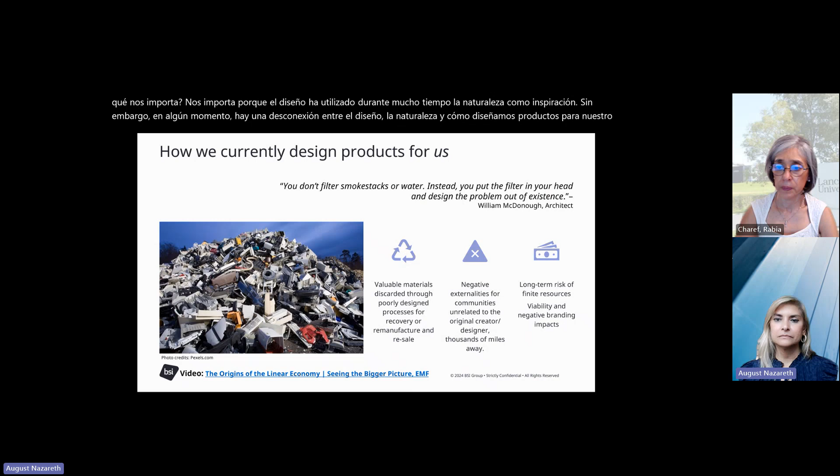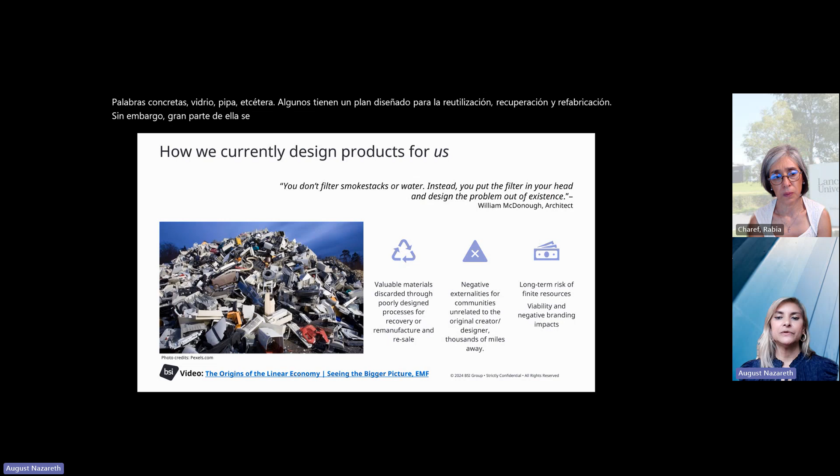In a building, a collection of highly valuable materials and products like steel, concrete, woods, glass, pipe, etc. Some have a designed-in plan for reuse, recovery, remanufacture. However, much of it will be discarded because there isn't a way for these materials to get back into the supply chain or secondary materials market.

However, we think this is a matter of time before QR codes, RFID, and IoT sensors are used to tag, meta-tag, and identify the manufacturer and life stage. Reverse logistics and take-back information will become visible via digital twins and similar technologies. And we suggest it will happen because of new laws, environmental regulations, and extended producer responsibility.

So why do we have this situation? We call this the linear economy. This is an economy that is a take, make, waste economy where goods always move in one direction, from raw extraction, manufacture, use, to waste. As we know, sometimes that use is only one minute, like the plastic bottle.

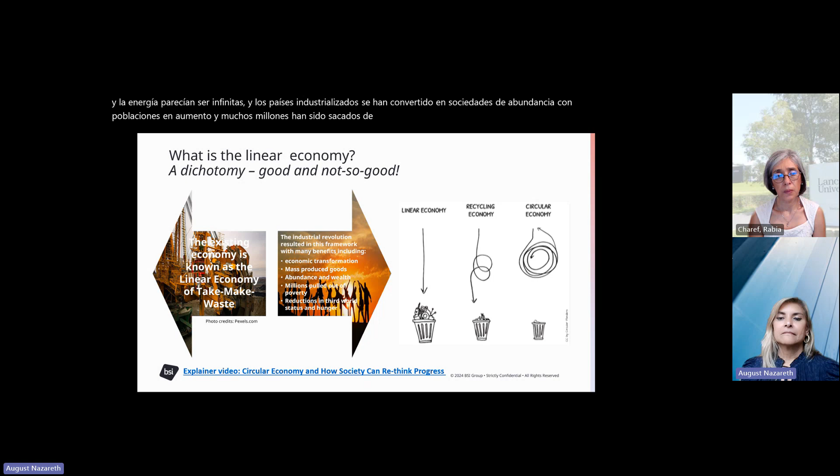The Industrial Revolution brought many benefits. For the first time, goods were able to be mass-produced, raw materials and energy seemed to be infinite, and industrial countries have become societies of abundance, with soaring populations, and many millions have been pulled out of poverty. So where there are middle classes that can afford to live without disease or hunger, this has a legacy footprint

of process, machinery, logistics, communities that rely on the linear economy. The next slide, borrowed from Rabia, shows the comparison of both economies, and perhaps we can understand why it's difficult to get out of this linear economy. Here they are illustrated together.

But for now, we know that there is funding available through the legislative acts, and there's an impetus for change, and we think that it will arrive with new project requirements. Further, design software is getting more sophisticated in terms of built-in sustainability for building performance, material choices, etc. There are many opportunities to make a difference in individual ways that fit your organization.

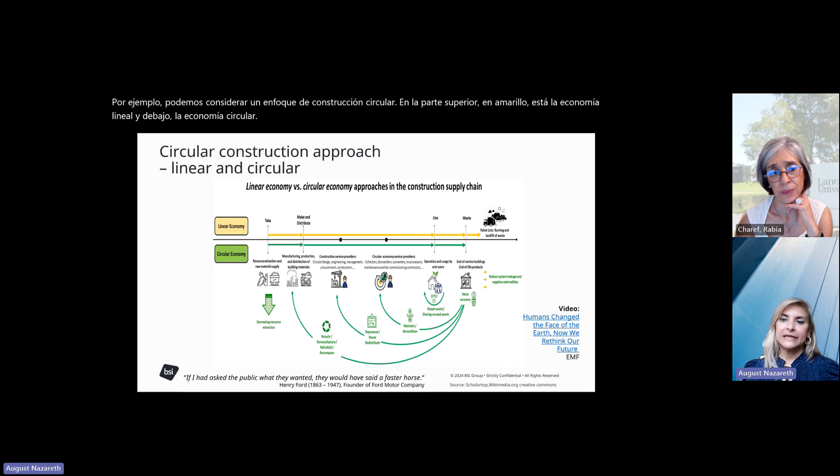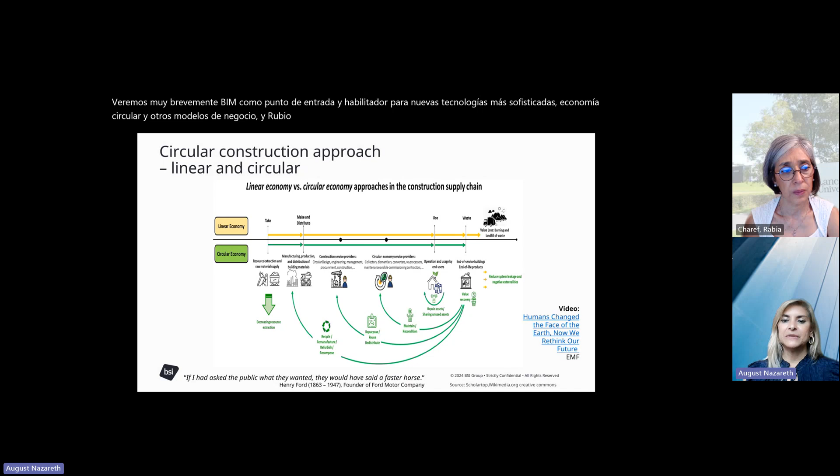For instance, we can look at a circular construction approach. On the top in yellow is the linear economy, and below is the circular economy. We'll look very briefly at BIM as an entry point and enabler to more sophisticated new technologies, circular economy, and other business models. And Rabia will walk you through the business case of why BIM and 3D modeling makes so much sense.

BIM is the foundation for sustainability, circularity, and is really an entry point to many more technologies. Because a lot of what you need to do in sustainability and the circular economy is based on data. If you can't find it, then you can't reuse it. You can't take it to the next critical operation.

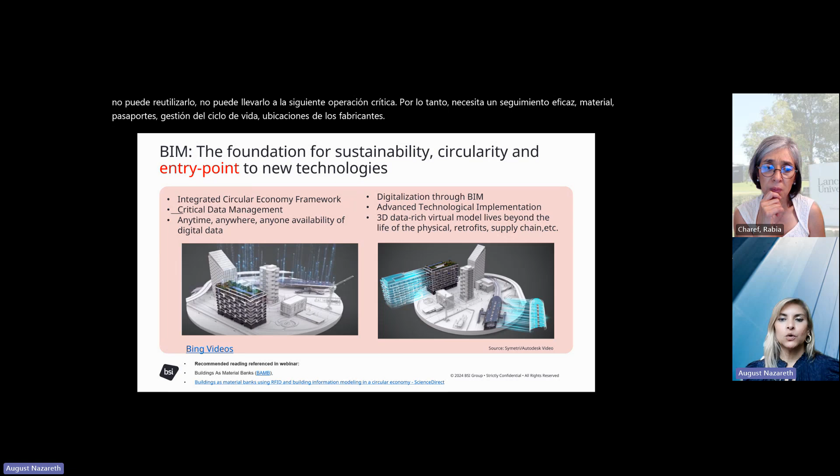So you need effective tracking, material passports, life cycle management, manufacturer locations, future ESG considerations for scope 1, 2, and 3, and also extended producer responsibility regulations, which are coming. Yes, this is what BIM does for you.

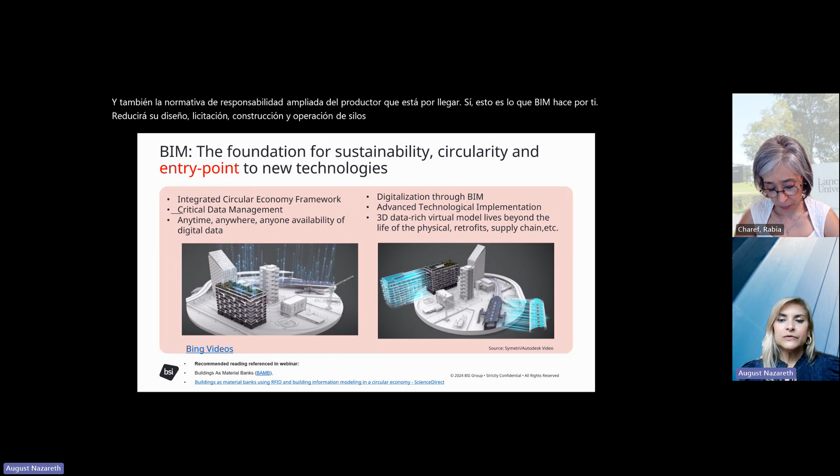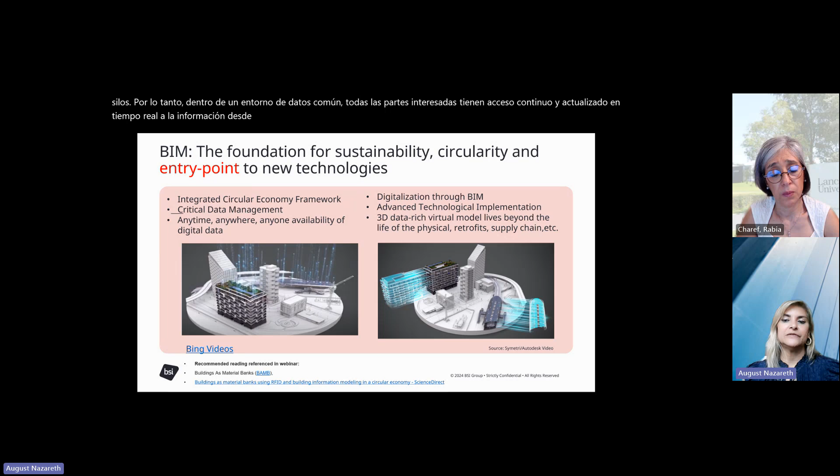It will reduce your design, bid, build, and operate silos, and if done right, remove those silos. So within a common data environment, all stakeholders have continuous updated real-time access to information from any place, anywhere, throughout the project, and even beyond project teams.

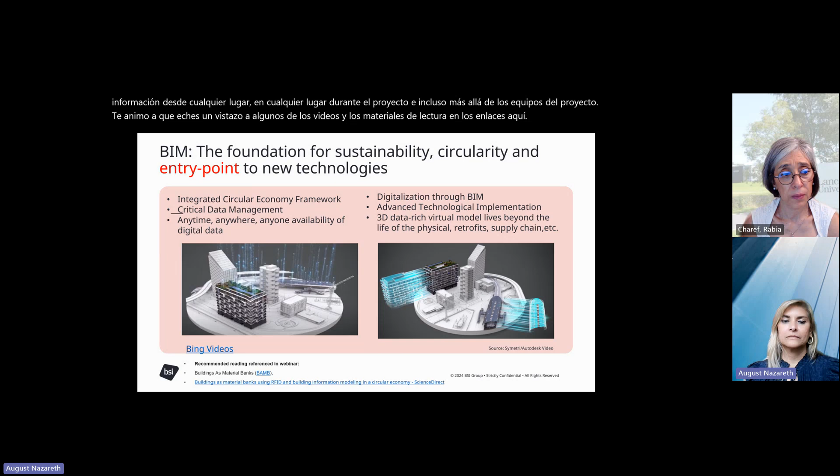I encourage that you take a look at some of the videos and the reading materials in the links here. I will leave this here for reading at another time, because we're out of time to get to my case study. But briefly, these are all enablers to get to the data, because data is the backbone of the circular economy.

So here is a case study of the Ford Rouge Center, which is the Ford car maker site and facility. It's a master planning and revitalization by Bill McDonough of Cradle to Cradle book.

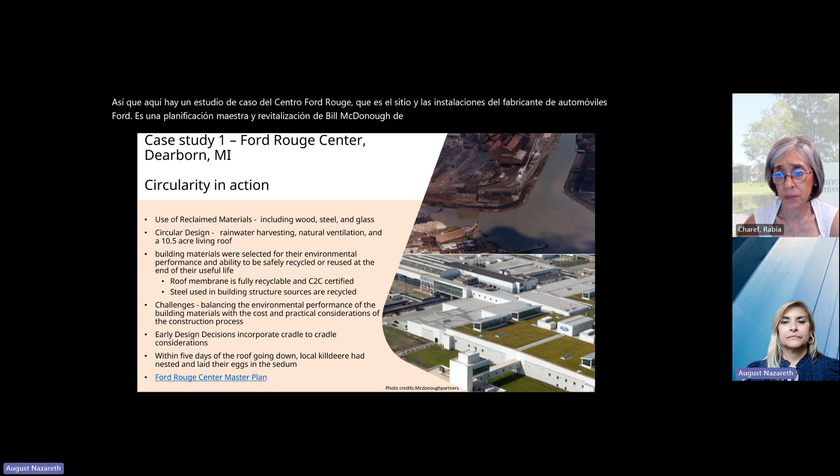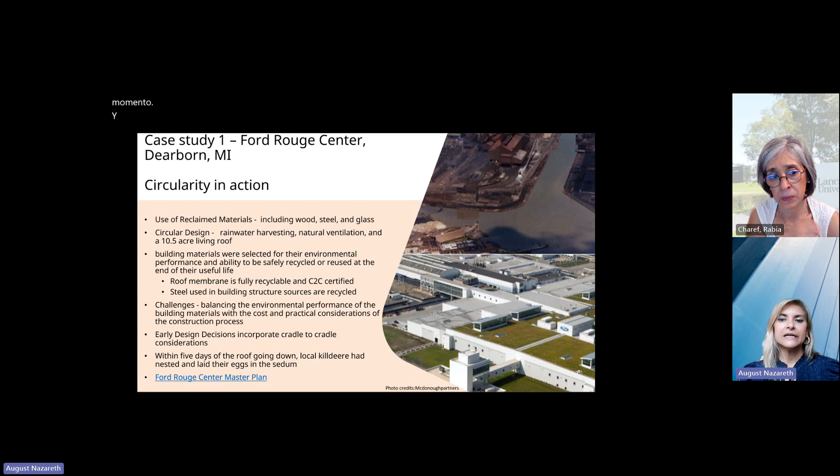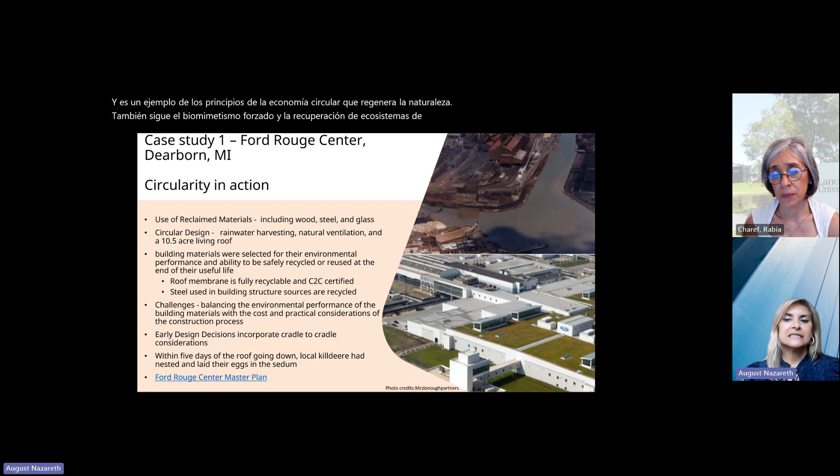At the heart of the new system lies a 10.5-acre living roof, the world's largest green roof installation at the time, and is an example of the circular economy principles that regenerate nature. It also follows forest biomimicry and closed-loop ecosystems, reclaim and reuse of wood, steel, glass in a continuous cycle.

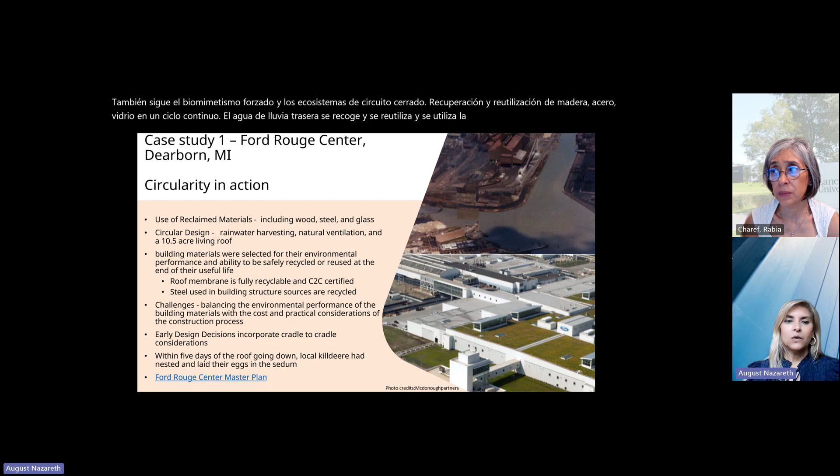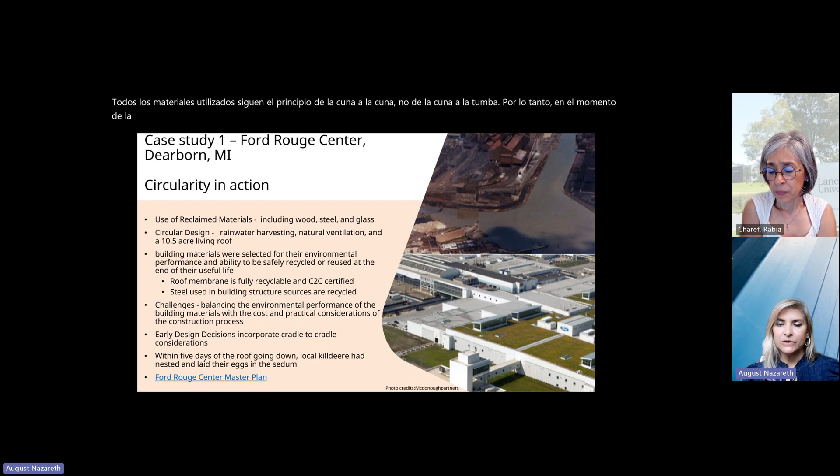Rainwater is harvested and reused, and natural ventilation is used throughout. All the materials used follow a cradle-to-cradle principle, not cradle-to-grave. So at the time of install, there's awareness of where that material, once it reaches its useful life or gets degraded, where is it going in the next process? And it's something that is not landfill or incineration.

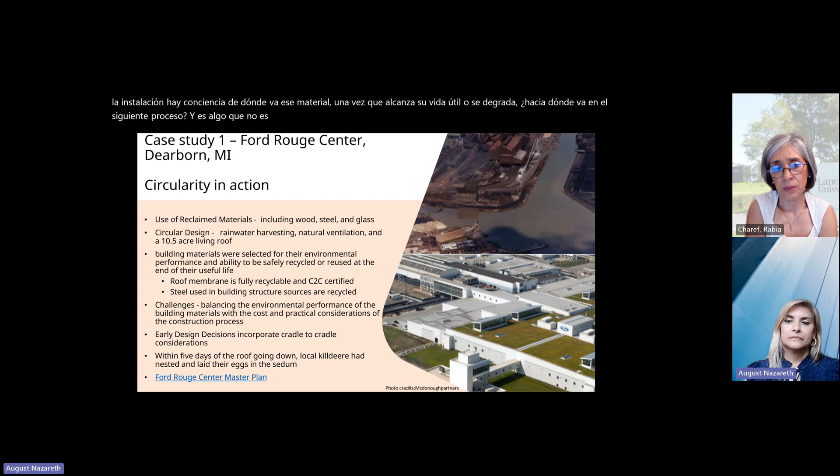Again, there's a link here that is very useful to take a look at it. And now I turn you over to Rabia Charef and her very interesting case study featuring 3D to 8D, which is a result of many years of research.

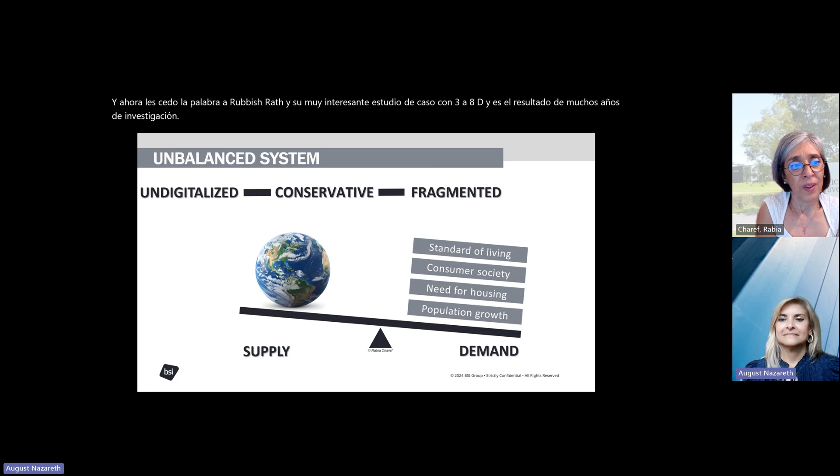Thank you, August, for sharing insights on this fascinating topic. So just to sum up what August just said, what is the problem for the construction sector? The sector is responsible for an enormous volume of waste and consumes a huge amount of natural resources. But the undeniable truth is that we have only one planet with limited resources, and the demand is continuously increasing. Another reality is that the construction sector is lagging behind compared to other sectors. It is still undigitalized, fragmented, and clinging to conservative practices.

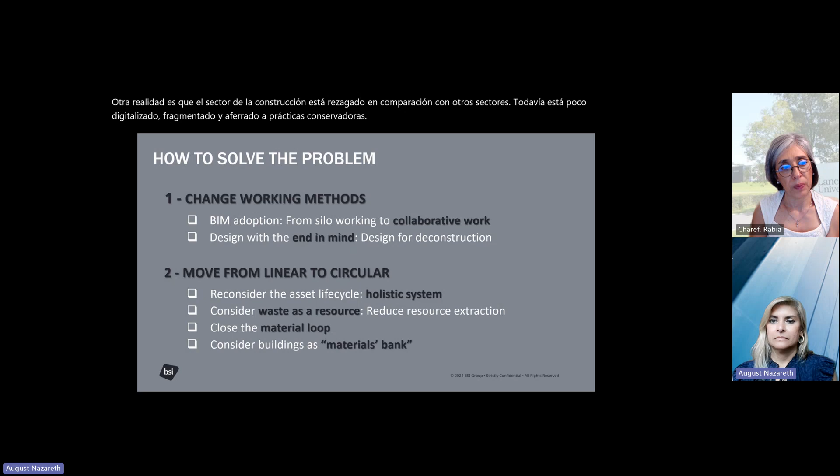So we are facing a lack of efficiency and a sustainable growth dilemma. How can we address these challenges? First, we need to digitalize our sector. This means adopting technologies like BIM to streamline processes and improve efficiency.

Second, we must change our design methods. We need to start by designing buildings with their end of life in mind. We need to think about how these buildings can be adapted and repurposed over time to ensure flexibility and adaptability. We also need to think about what will happen to the material when a building can no longer be used. This is where design for disassembly or design for deconstruction comes in, because these approaches make possible the reuse of materials.

We also need to move from our current linear economy to a circular economy, as it was explained by August. In a nutshell, we can say that the circular economy considers waste as a resource and buildings as material banks.

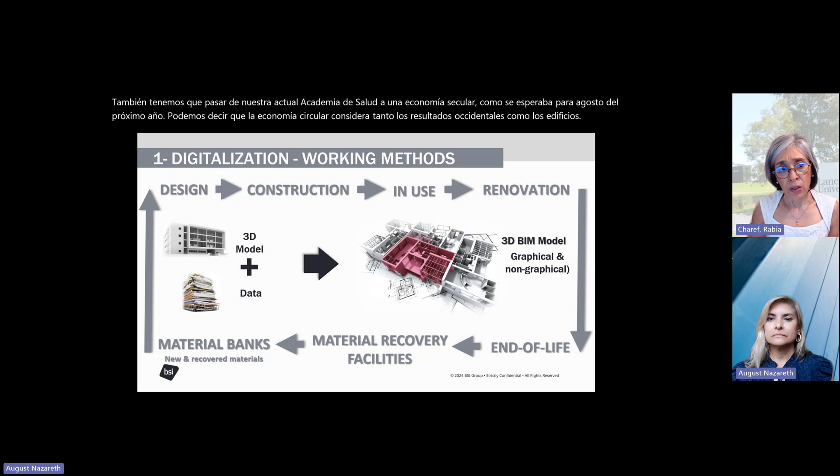So changing our working method, what does it mean? We need to move away from silo working practices and instead work collaboratively by using BIM technology.

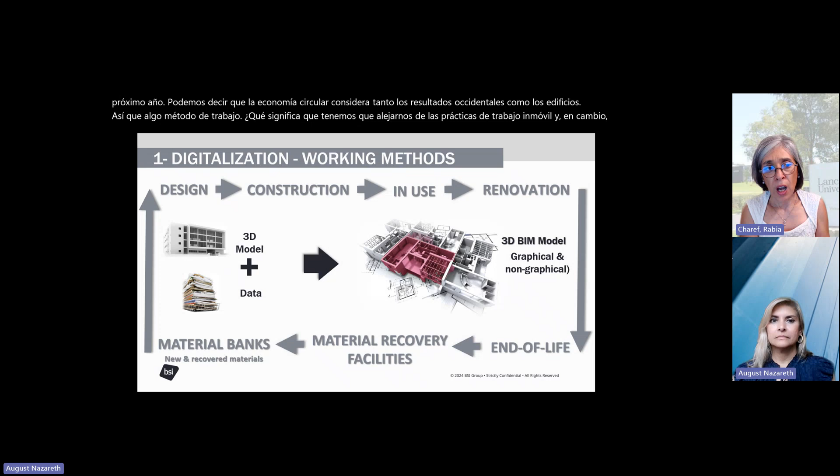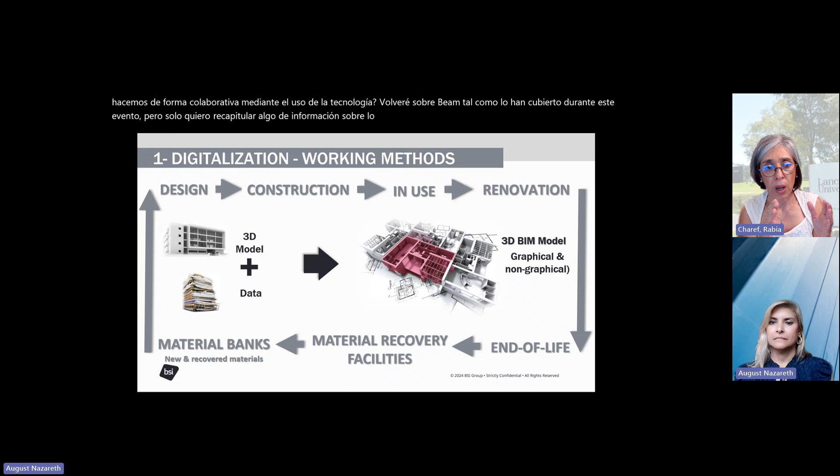I won't go back over BIM as you have covered it during this event, but I just want to recap some information about what is the 3D model and the difference with the 3D BIM model. It's the data that we put on it. We add graphical and non-graphical data.

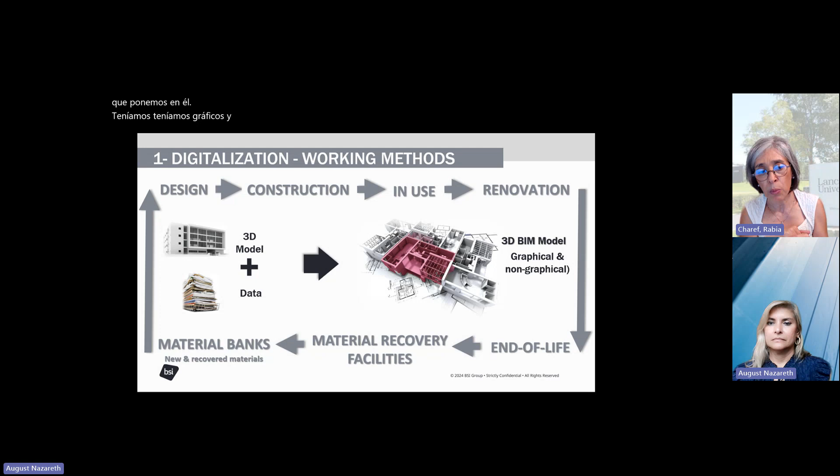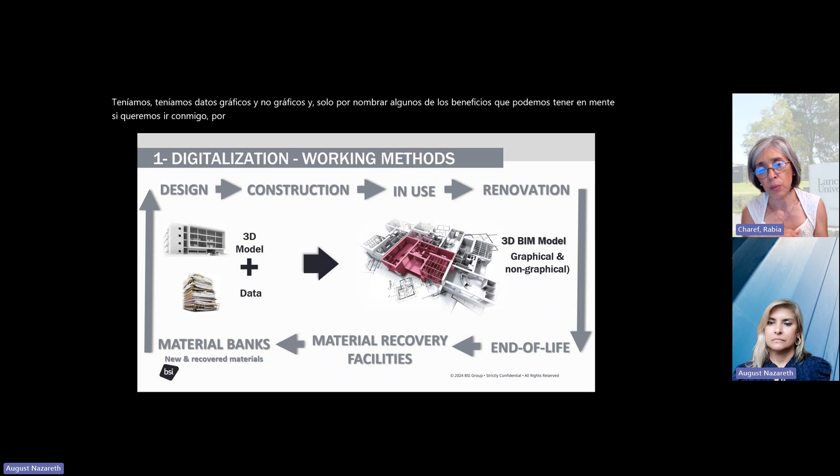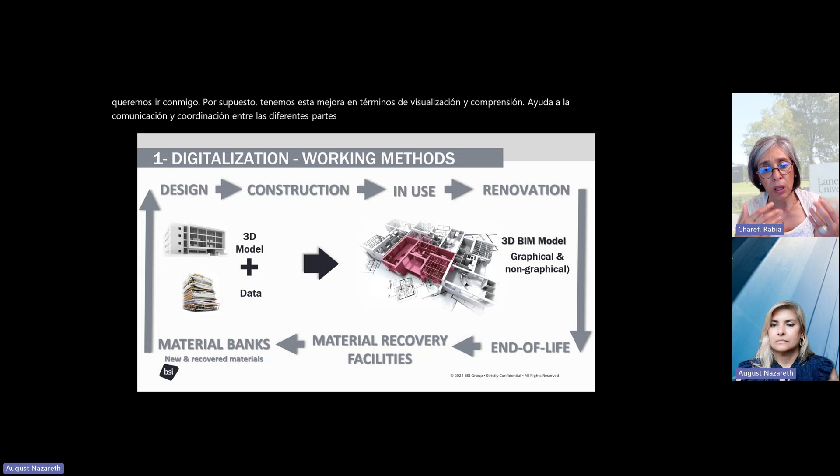Just to name a few benefits that we can have in mind if we want to go with BIM: we have this improvement in terms of visualization and understanding, it helps for communication and coordination between the different stakeholders, and also BIM can be used for the maintenance and operation of buildings.

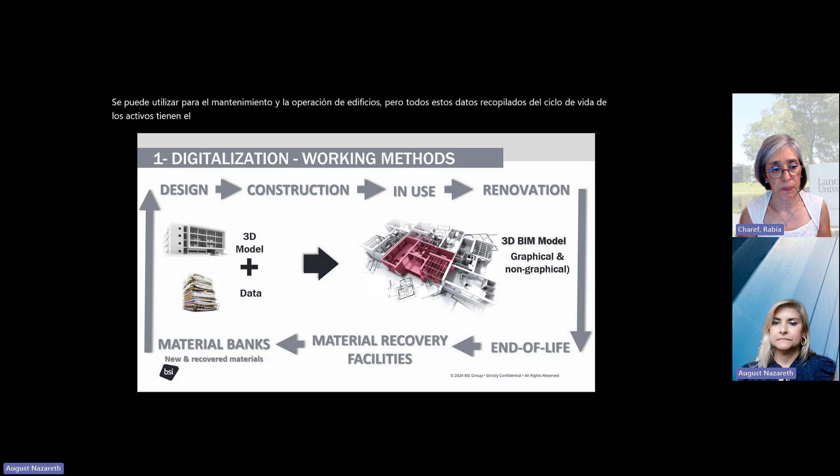But all this data collected throughout the asset life cycle has the potential to support the management of the end-of-life activities and beyond, because the data could be used by material recovery facilities and also by material banks or material platforms.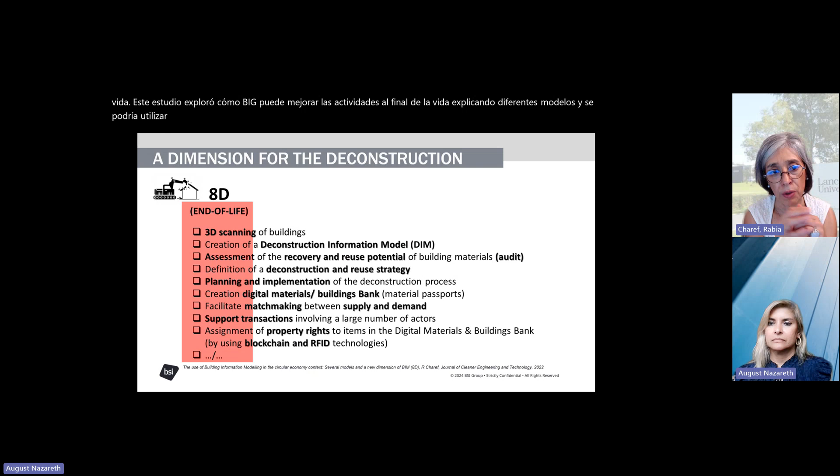More recently, in 2022, a study filled the gap and proposed the 8th dimension for managing the end-of-life activities. This study explored how BIM can enhance end-of-life activities by explaining the different BIM models. And the 8D could be used for the creation of the deconstruction information model, the model that will contain all the information related to the deconstruction.

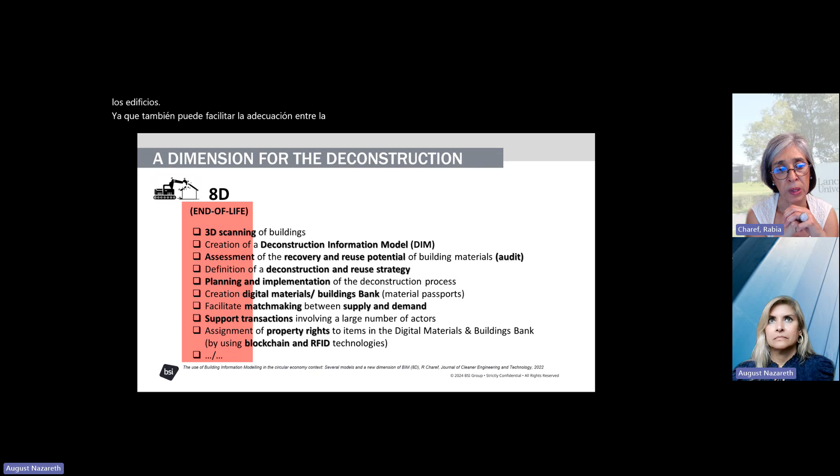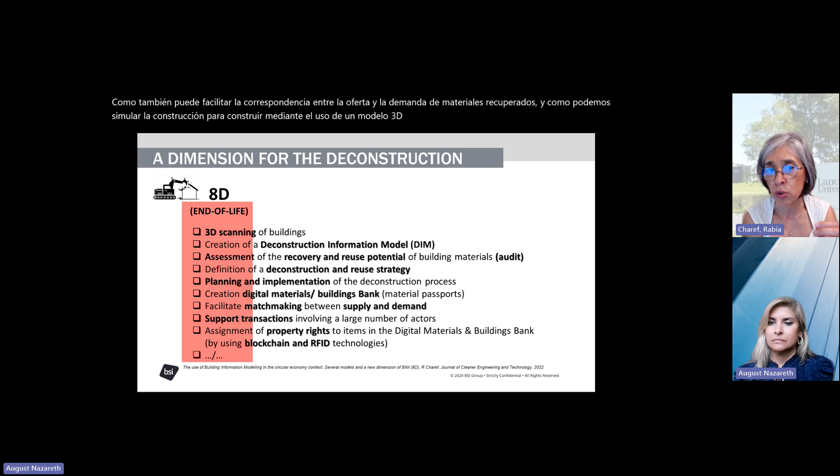It could help for the audit to assess the recovery and reuse potential of buildings, and it can also facilitate the matching between supply and demand for recovered materials. And just as we can simulate the construction of a building by using a 3D BIM model with 4D, we can also simulate the deconstruction scenarios and decide to go for the more sustainable strategy.

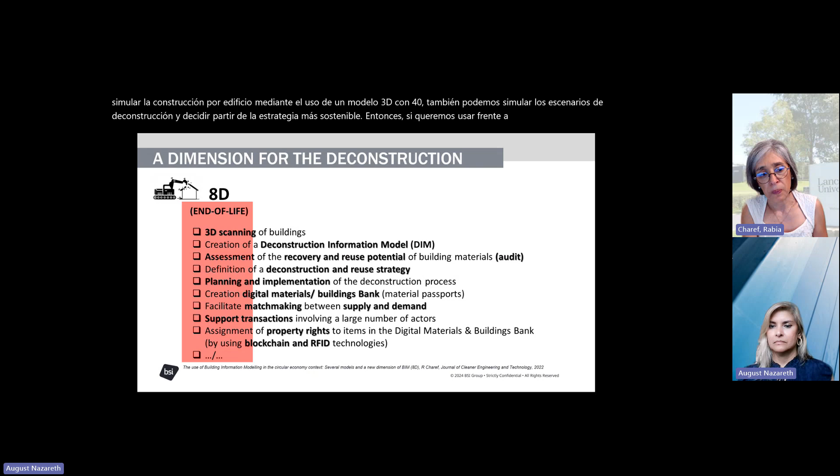So if we want to use BIM for the asset life cycle, we need to think about the data and how this data could be maintained and updated to be of very good quality. And that's where Material Passport comes in.

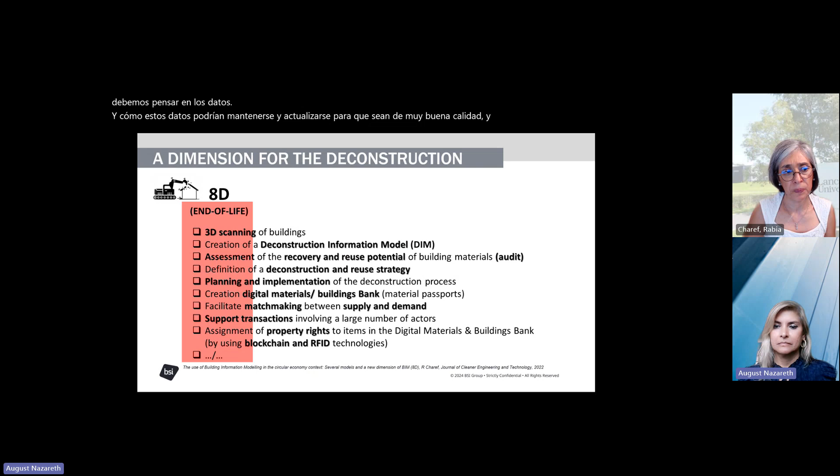So now, when all these materials are recovered, how can we facilitate their recirculation, keep them in a closed loop, and prevent them from becoming waste? According to Thomas Rau, waste is a material without an identity. So with Material Passport, we can provide this identity to every single material to keep them in circulation.

So to solve the problem, we also need to move away from our current linear economy. Many studies highlighted the importance of refurbishing and reusing existing buildings if we want to meet our environmental goals. In fact, between 85 to 90% of today's buildings are expected to still be in use by 2050. So it is crucial to consider our buildings as material banks and extend their service life as much as possible.

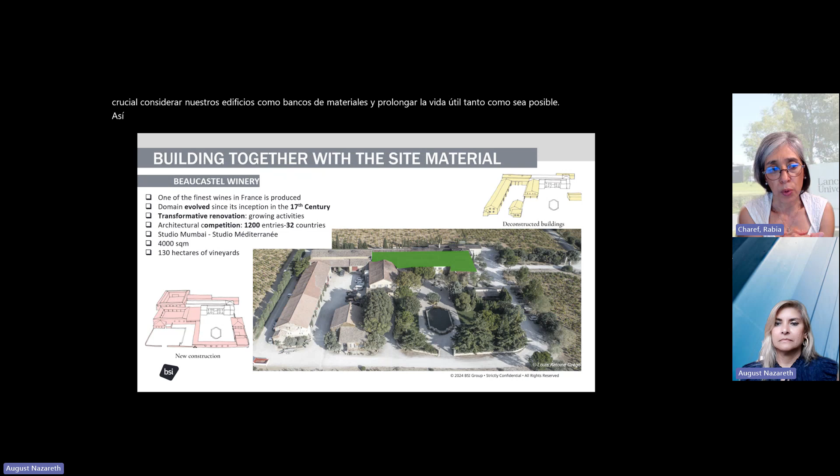So now let's move to a practical example of this approach. The project that I am going to present is the Beaucastel Winery, very famous for producing some of the finest wines in France. The original building dates back to the 17th century, and the domain has been extended several times.

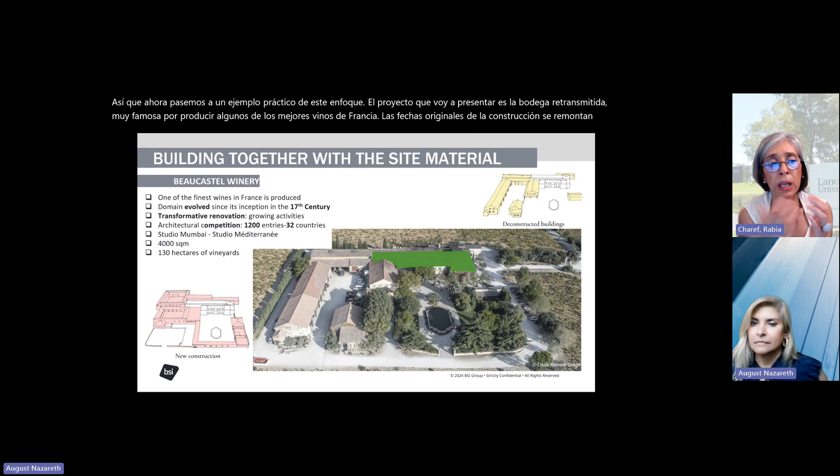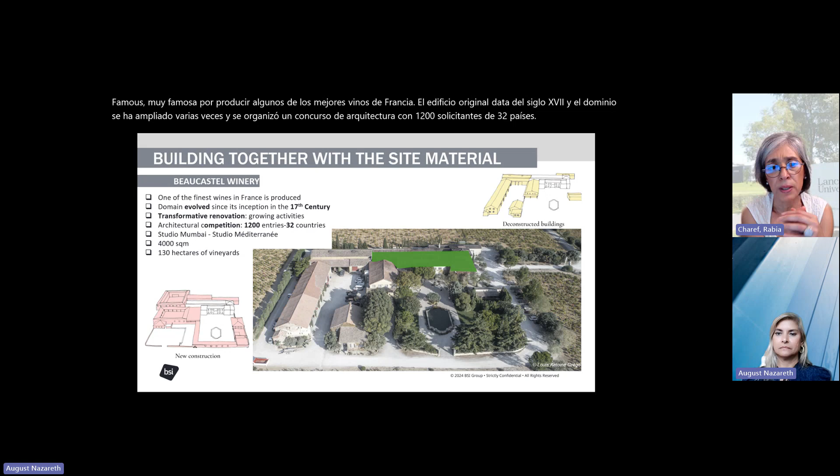An architectural competition was organized with 1,200 applicants from 32 countries. It's just to highlight the global interest of this project and the prestige. Studio Mumbai from India and Studio Mediterranee from France won this competition.

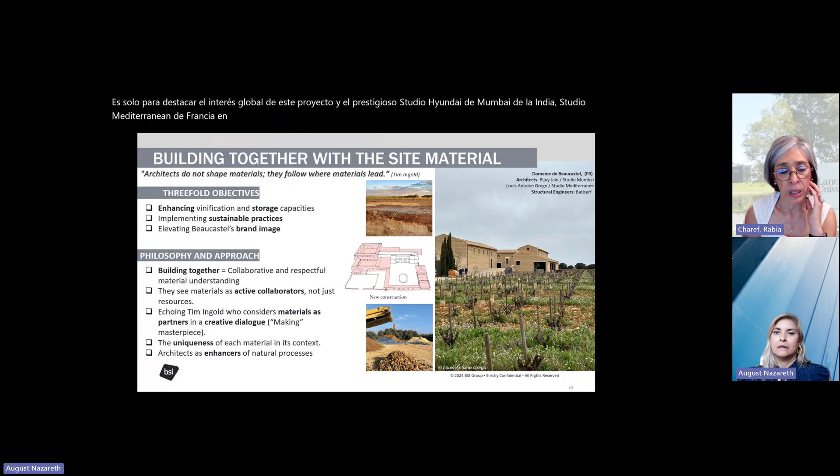This case study was designed by a team that considered their approach to be based on common sense and respect for the environment. The philosophy of this project centers on the concept of building together. This means developing a respectful and collaborative relationship with materials. They were inspired by Tim Ingold's making, who considers materials as active collaborators and not just resources.

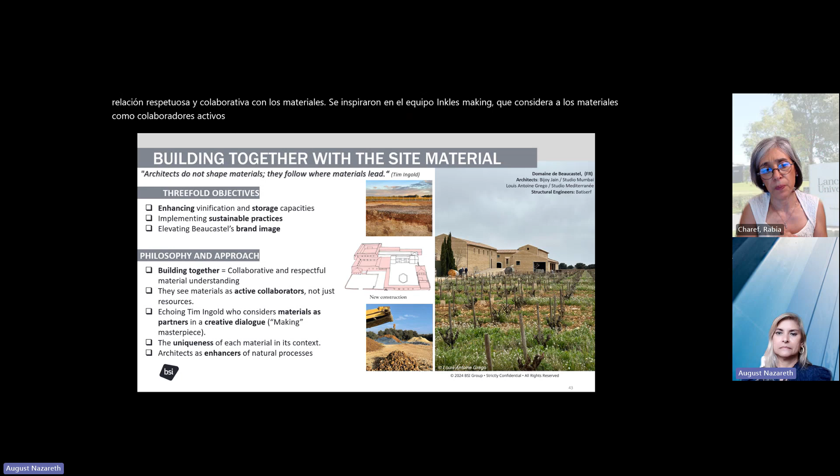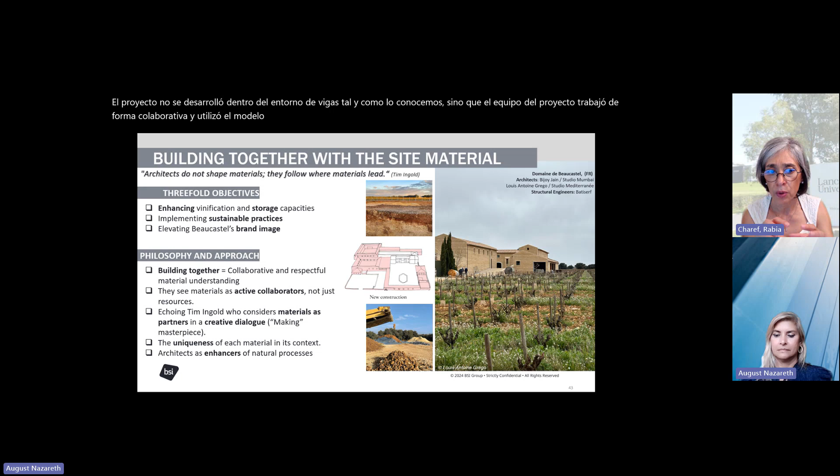The project was not developed within the BIM environment as we know it, but the project team worked collaboratively and used the 3D model to support their willingness to adapt the design to the material and not the other way around.

As architects, the team ensured that the design flowed naturally with the surrounding. They also integrated the design seamlessly into the environment rather than trying to impose it. This approach perfectly aligned with what August presented, the idea of mimicking nature where no waste does exist.

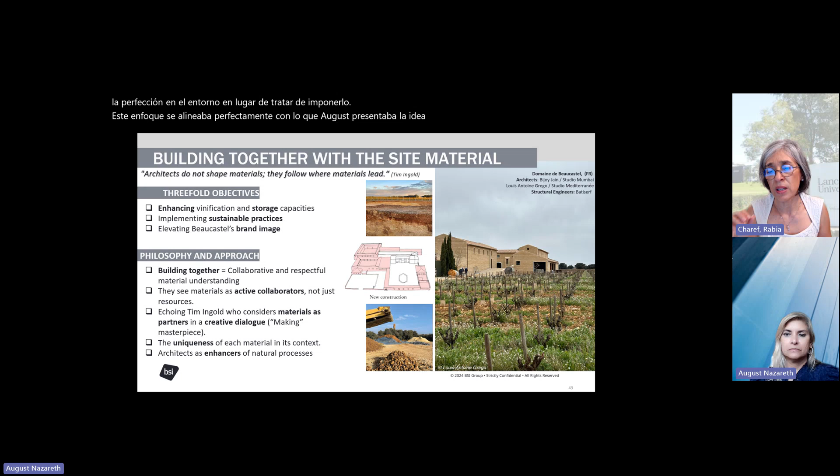Let me explain the approach and construction process for the Beaucastel project. For this project, the first thing they did was assess and understand the site and existing buildings. They identified what could be preserved, renovated, and reused.

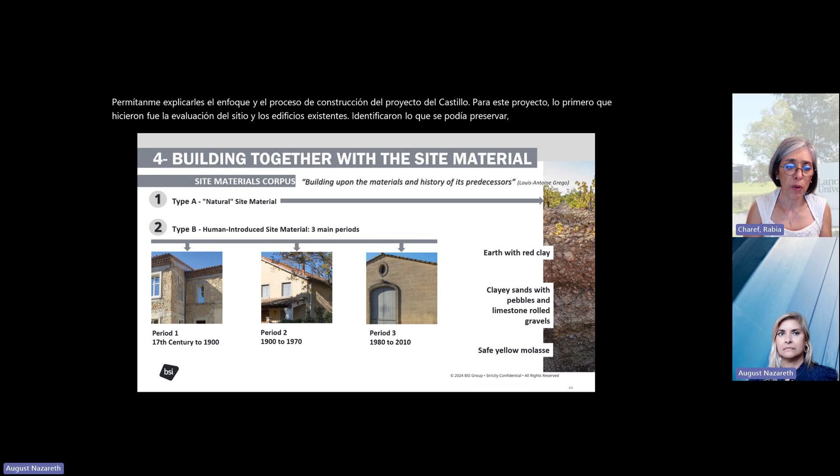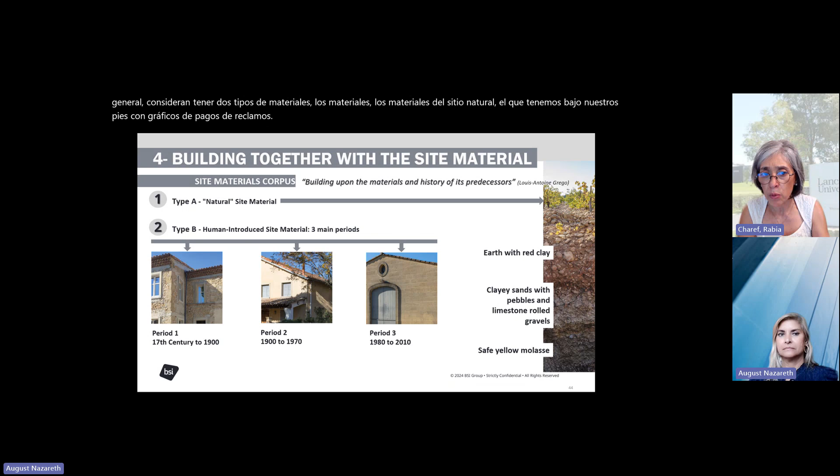They usually consider having two types of materials. The natural site materials, the ones we have under our feet, earth with clay, pebbles, gravels. The design team worked collaboratively with masons, structural engineers, researchers, and the client, and they looked at how they can use this material for construction.

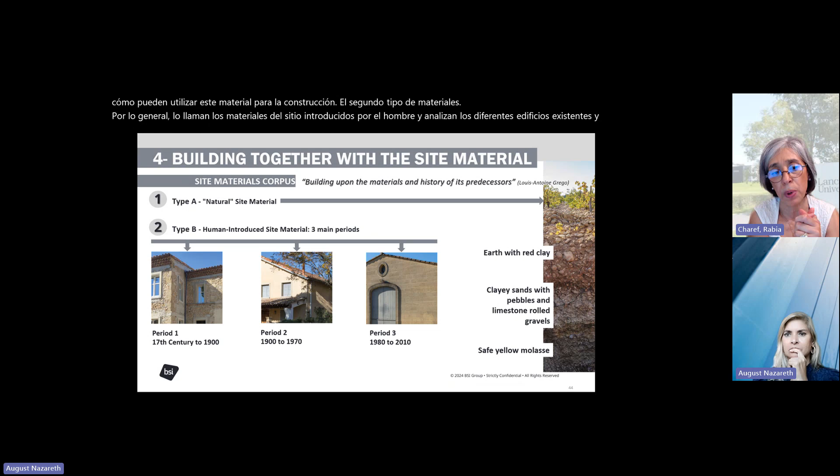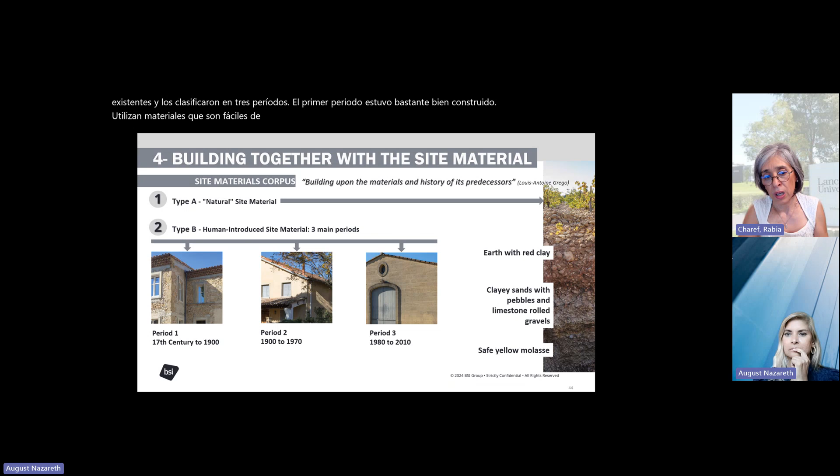The second type of materials they usually name the human-introduced site materials, and they analyzed the different existing buildings and categorized them into three periods. The first period was quite well constructed, and they used materials that were easy to reuse, like stone, pebbles, wood. So for this period, they kept everything and repaired the building.

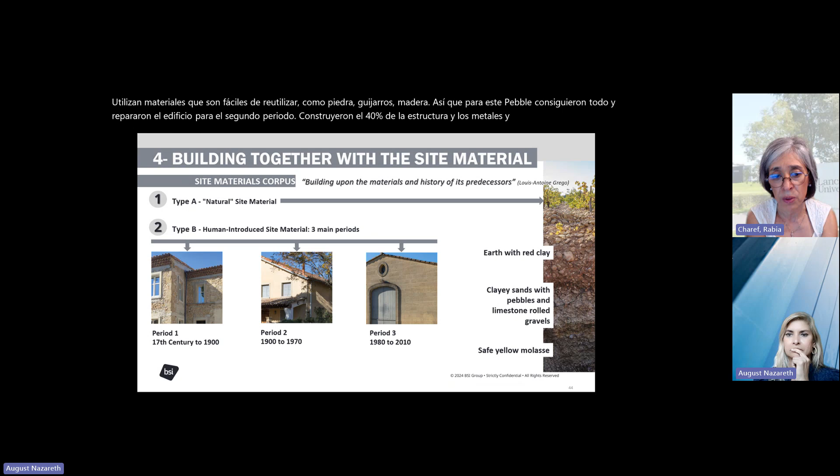For the second period, they deconstructed 40% of the structure and recycled metals and concrete. Unfortunately and interestingly, the more recent period has proven less easy to reuse for two main reasons. The first reason is that the buildings were mainly made with composite materials that are difficult to separate and reuse. And the second reason, they often contain plastics.

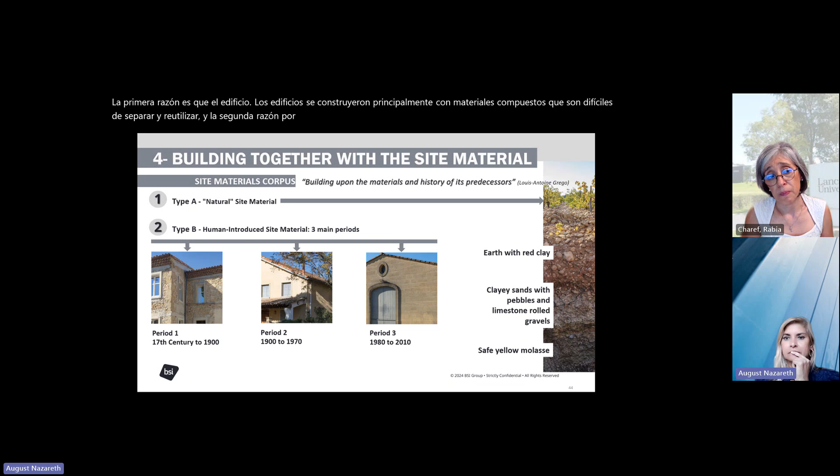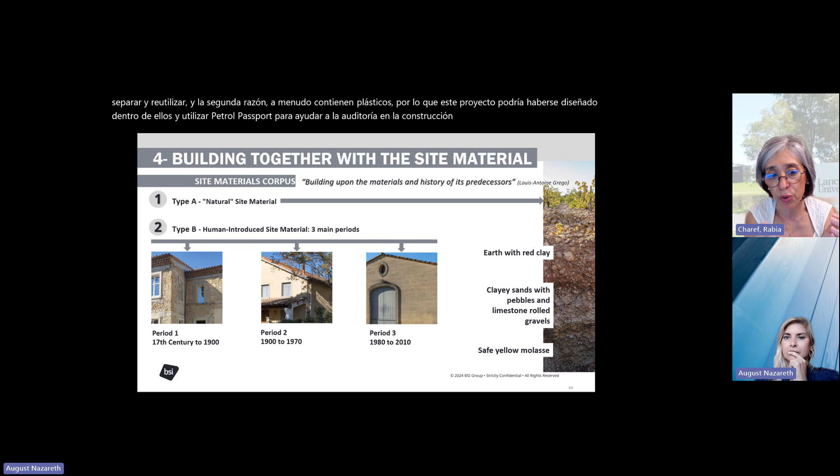So this project could have been designed in BIM and use material passports to help with the audit and the deconstruction. In particular, the use of material passports could facilitate the management and tracking of recovered materials. It will be easier in the future to reuse the material because they have an identity and the data related to their life.

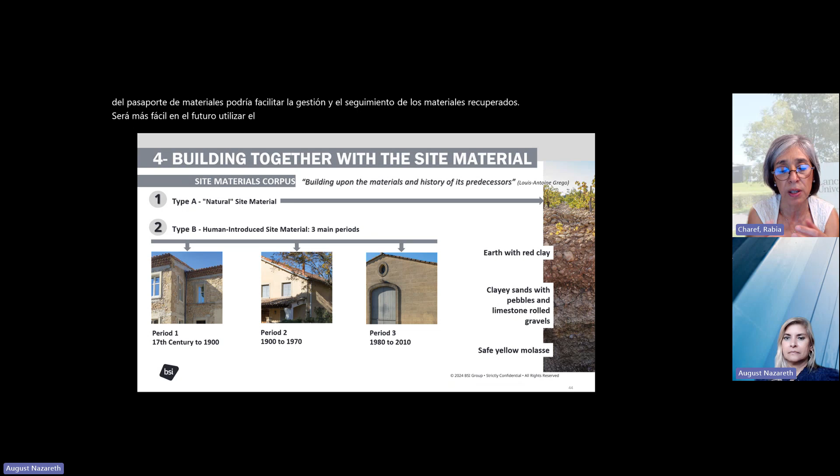Although this building is not certified as circular, it was designed and constructed with a closed-loop approach because it reused 80% of the existing materials.

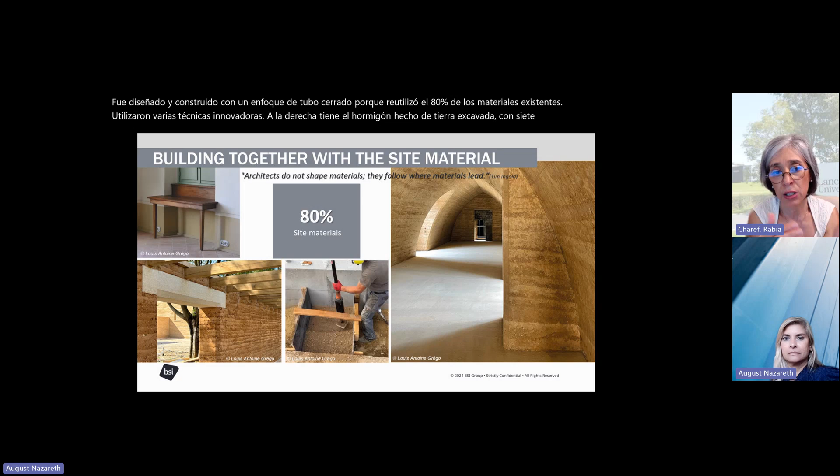They used several innovative techniques. On the right, you have the site-rammed concrete made of excavated soil with cement. On the bottom left picture, you can see the rammed earth wall. When the soil has clay, cement is not necessary to manufacture the rammed earth; they use just earth and water. And in the center, you can see the pneumatic rammer that was used for both techniques.

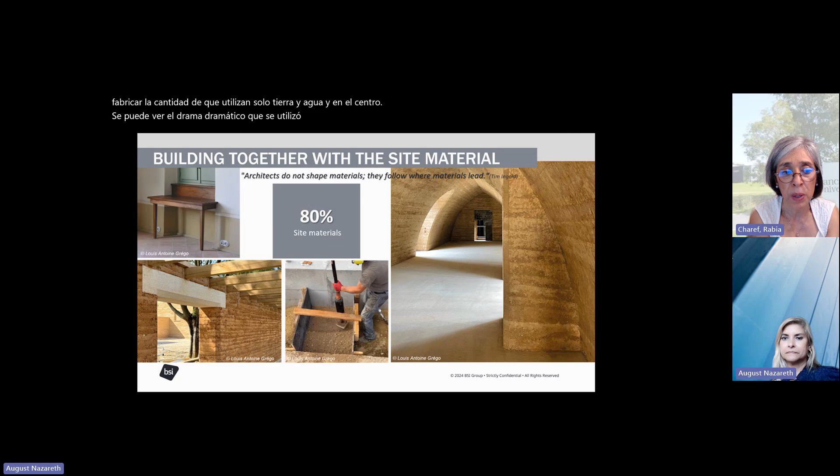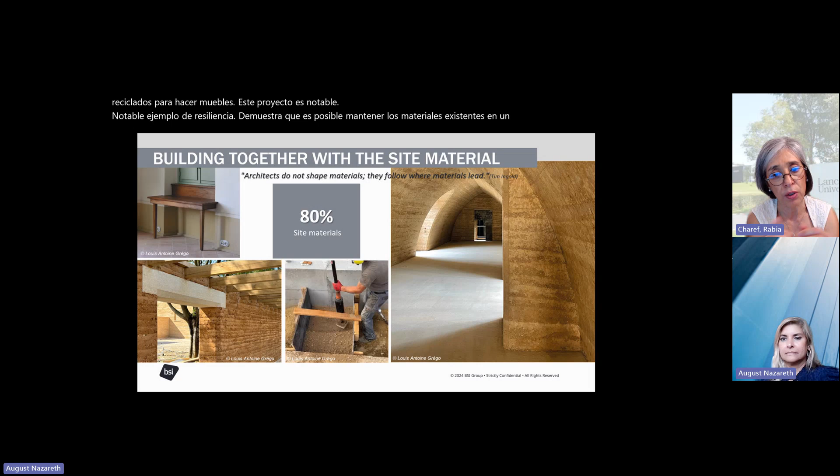Even old timber beams have been recovered and upcycled to make furniture. This project is a remarkable example of resilience. It demonstrates that it is possible to keep existing materials in a closed loop and limit the extraction of new resources. In this case, it was 80%.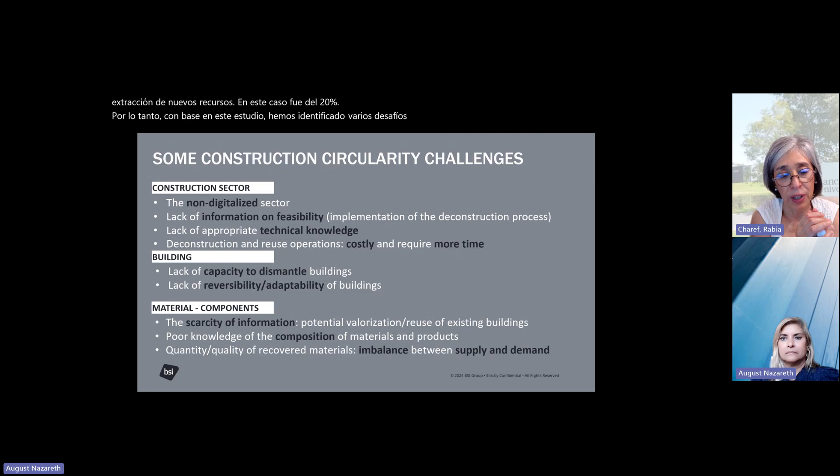So based on this study, we have identified several challenges at different scales. Because we are running out of time, sorry, we just invite you to have a look at this list later. Next slide, please.

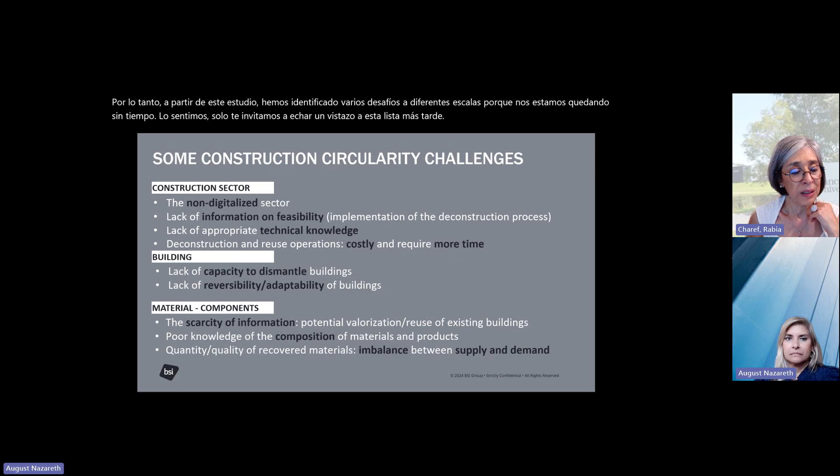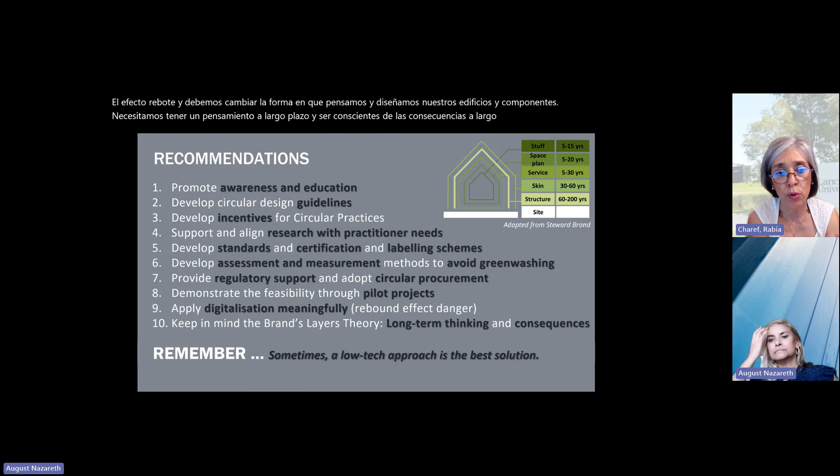Now, just a few recommendations and insights to raise awareness. I will pick just a few from the list. So we need to support the industry by providing guidance, standards, and incentives. Digitalization, we should use it meaningfully to avoid the rebound effect. And we must change the way we think and design our buildings and components. We need long-term thinking and awareness of the long-term consequences of our actions. And we should remember that sometimes a low-tech approach could be the best option.

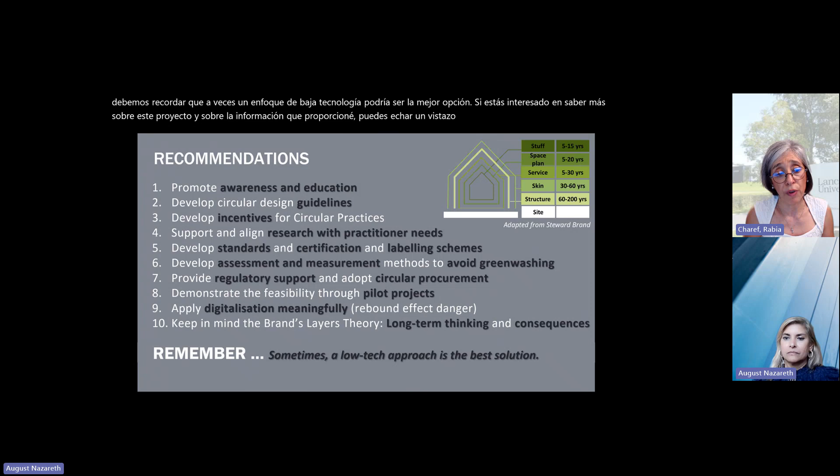If you are interested to know more about this project and the information that I provided, you can have a look at the list of references that we will provide you. Thank you for your attention, and I will give the floor to August.